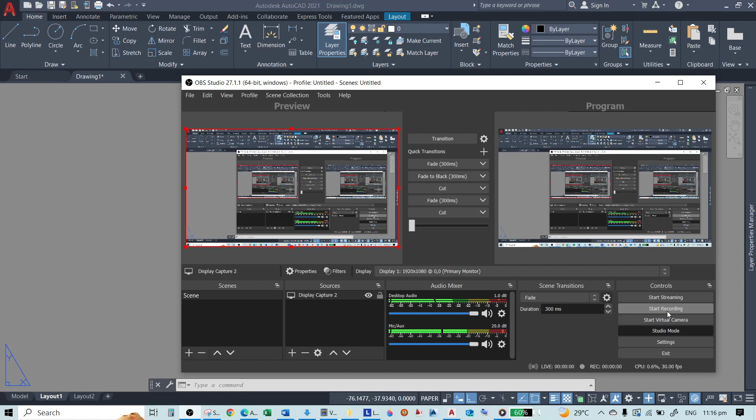Hello everyone, this video is about how to make section drawings in AutoCAD. So there are various ways of making section drawings or section views in AutoCAD.

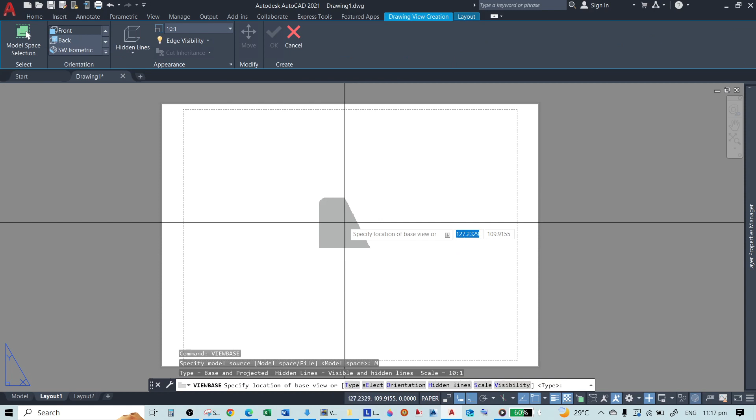One of those is using the command VIEWBASE. Type VIEWBASE and then select this one. So this is our drawing in our model. This is the front view, the right, left, top.

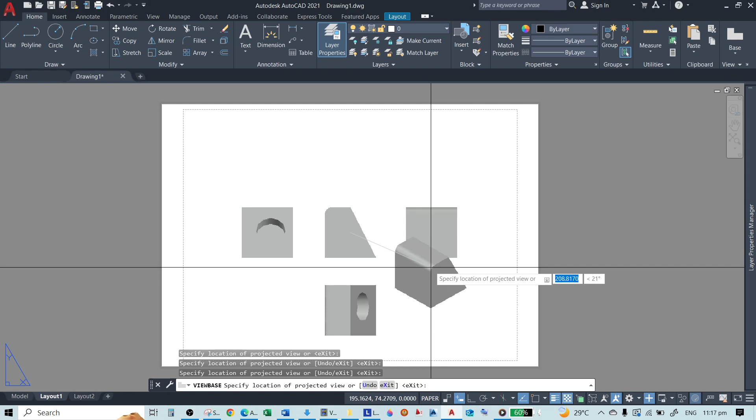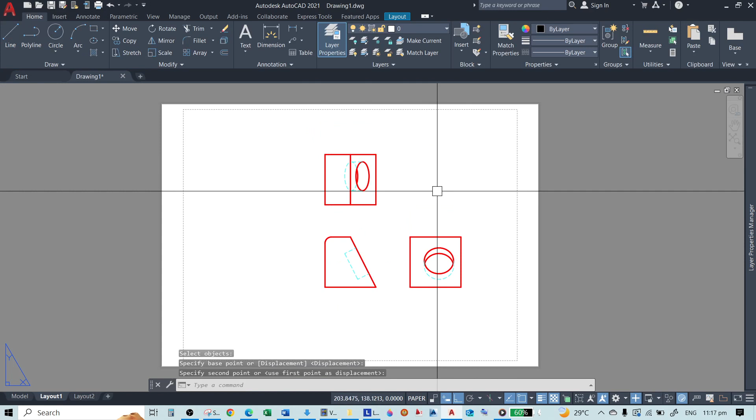So let's say for example we make a section view out of this drawing, let's say this top view. What we can do is just select this drawing and then go to section, so you can select whatever type of section you want. Let's use full section.

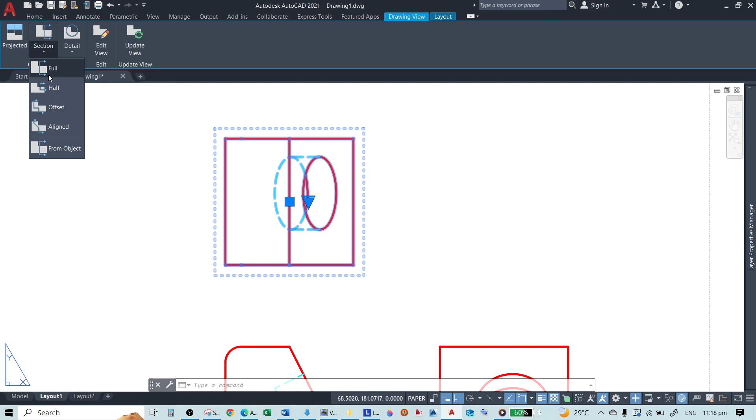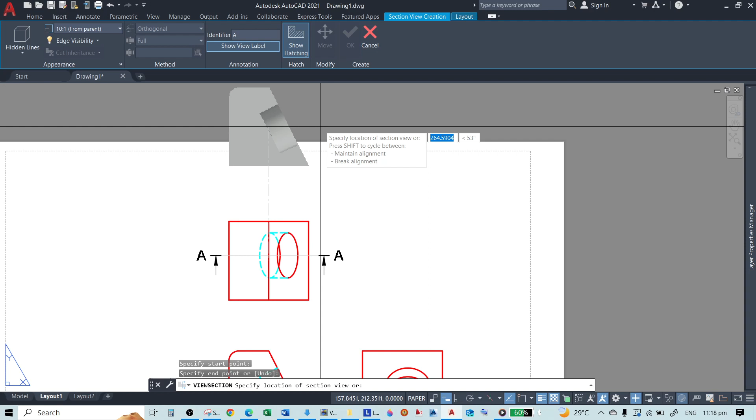Let's say coming from here, so wherever the arrow is pointed, that is where the part will be left to be shown in the section view. So for example this one, automatically this is already the section view.

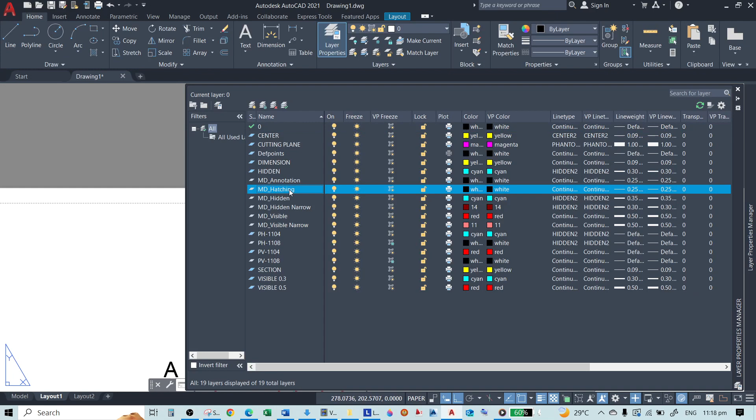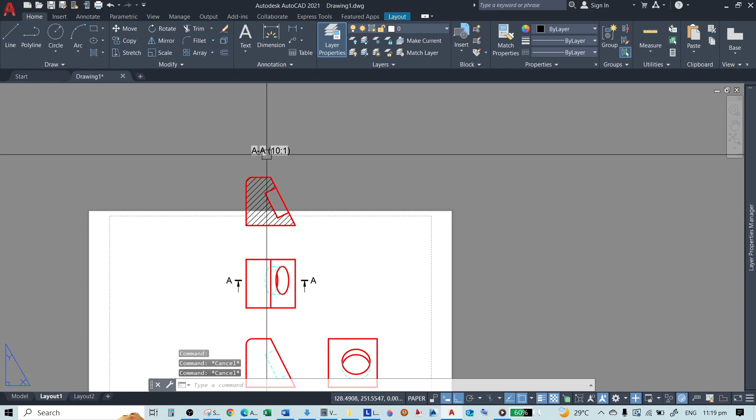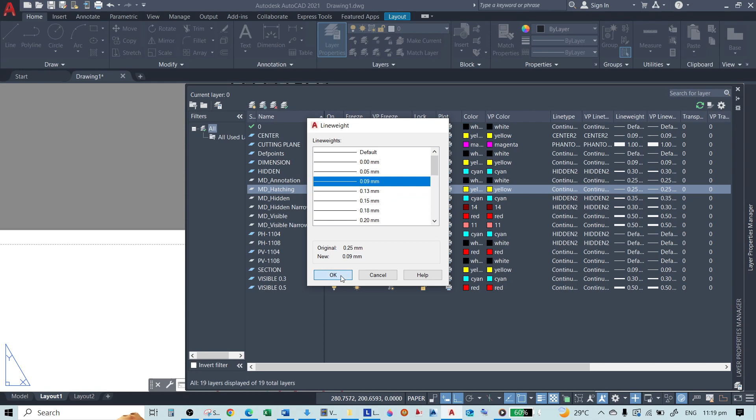Now this hatching, of course you will set this into the standard properties. Okay, this one. So this is our section view. You can delete this or just move it.

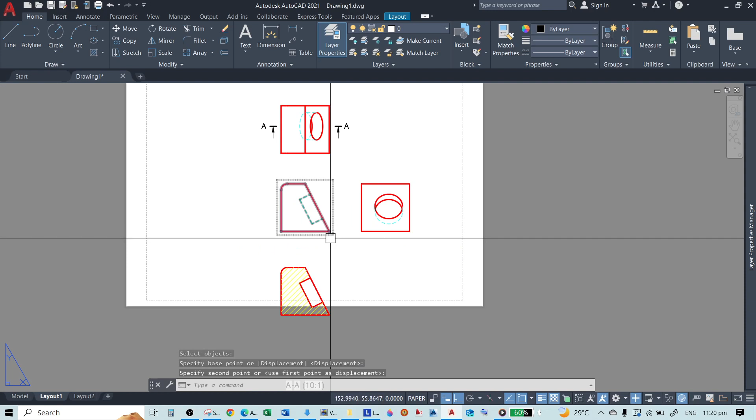Okay, now that's how easy it is to show the section view of this drawing.

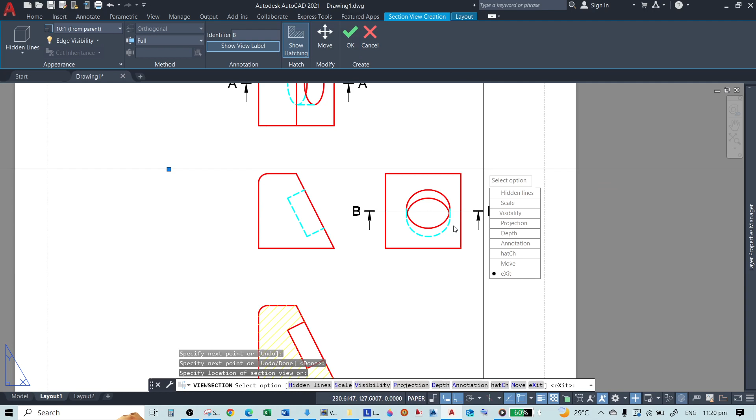Now let's say for example another one, for example I will make another view. Okay, excuse me.

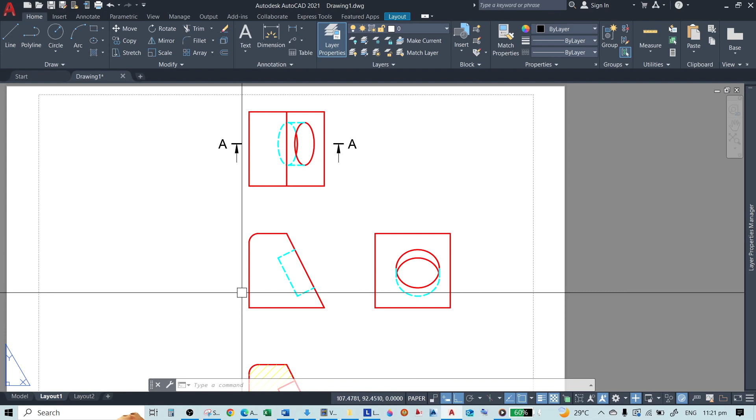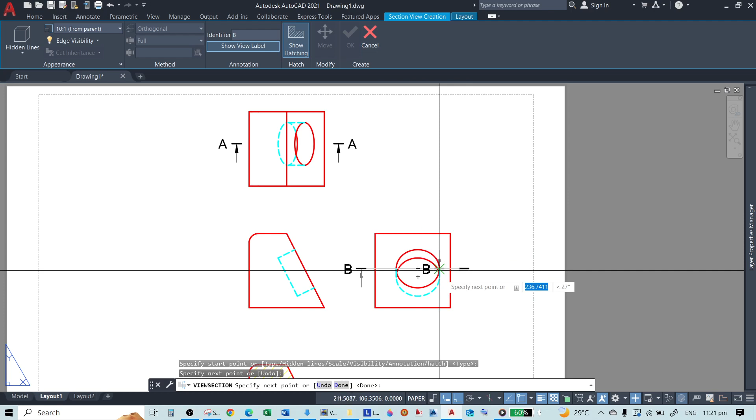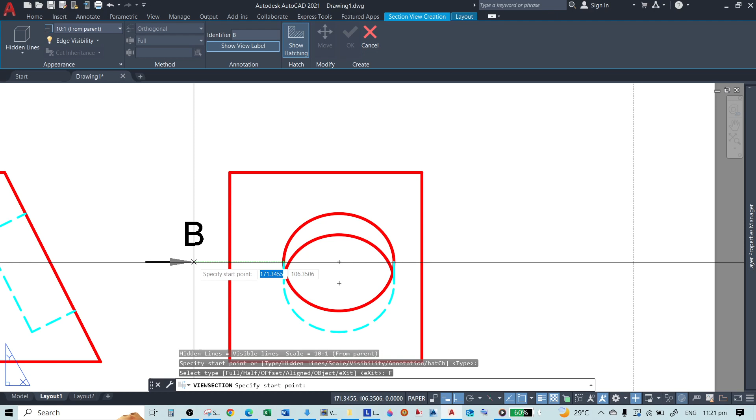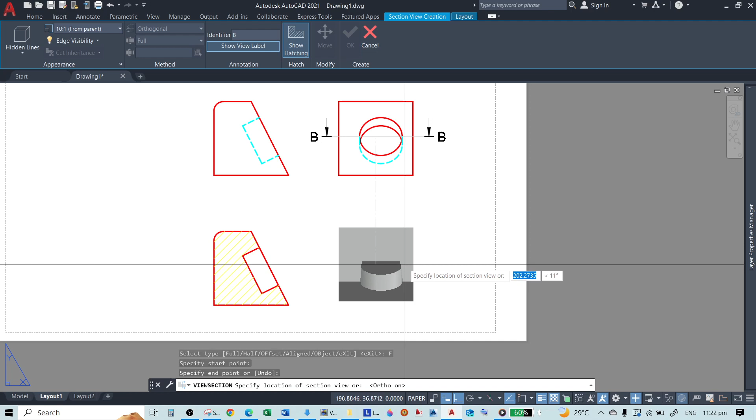Sorry, I'm trying something I haven't tried yet, let me see the result. If I click section here. So what I am doing right now is testing whether it's possible to automatically make an isometric drawing that is in a section view. As you can see right now, it's not possible to do that. So it's really not possible. Is that possible? I don't know, maybe I haven't figured it out yet, but for example...

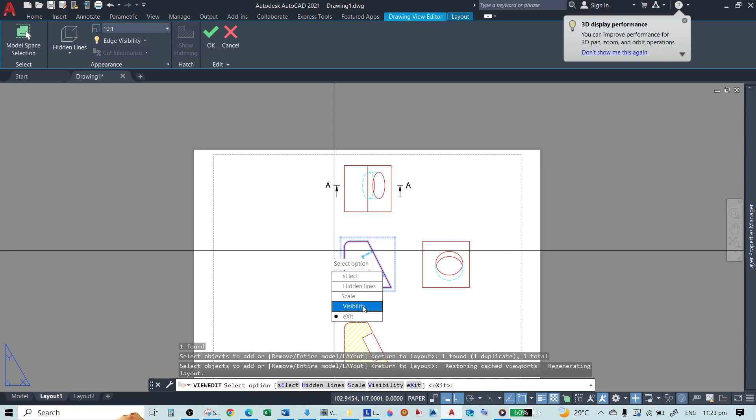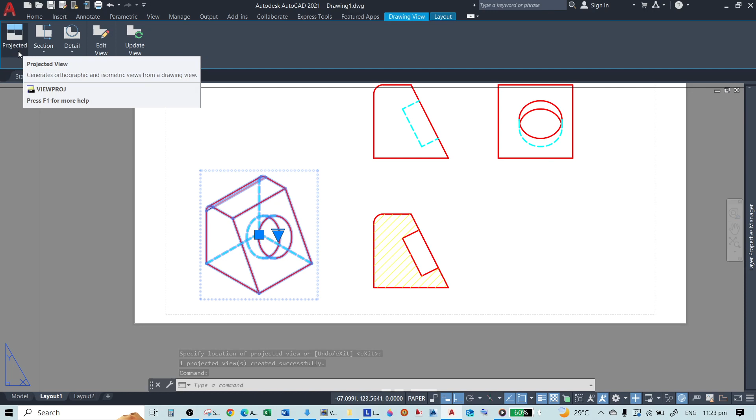So let's say for example we will make an isometric view. So it seems it's not possible to automatically section a projected isometric view. So it is not possible. Anyway, you can still use this, this is the easiest way to do the section view.

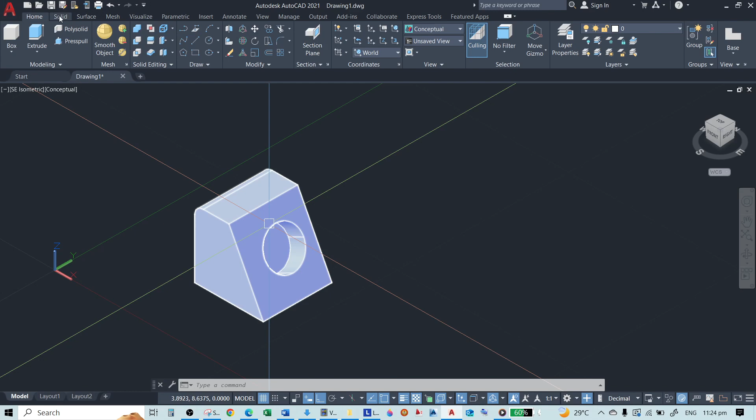Now the next one we're going to do is using the SECTIONPLANE command. So let's change the interface into 3D Modeling. Now go to Solid, it should be around here, or under Section, it can also be found there. Anyway, so this is the section plane, and then set the section plane you want.

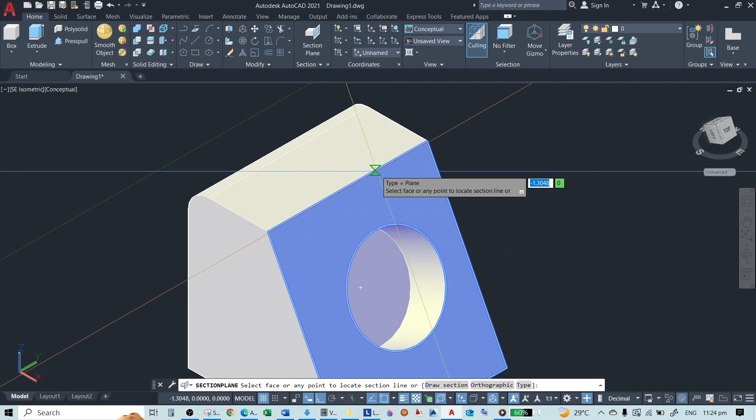You can draw it or you can use the orthographic view type, because what I want to do here is just make a full section view out of this drawing. I will just click orthographic. Now I will choose front. This is the front. Okay, so this is the section plane.

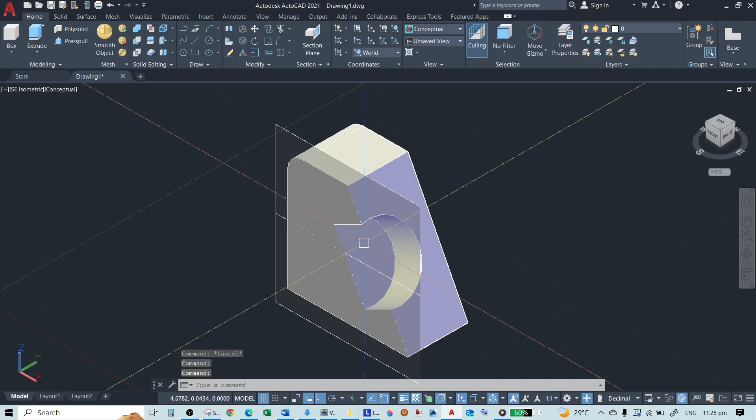Now using the section plane, as you can see, it is already in section view. Now what I am going to do is just select this plane here, right click, and then generate section 2D or 3D block.

Now this will prompt Generate Section/Elevation. We can make a 3D section or elevation. So using this one you can get a 3D section, the isometric drawing that is in section view, and then it includes all objects, or select objects to include. So if there are a lot of objects in your drawing, and you only want one of those to make the section view, just select this and then select the object. But there's only one, so I will just use include all objects, and then insert as new block.

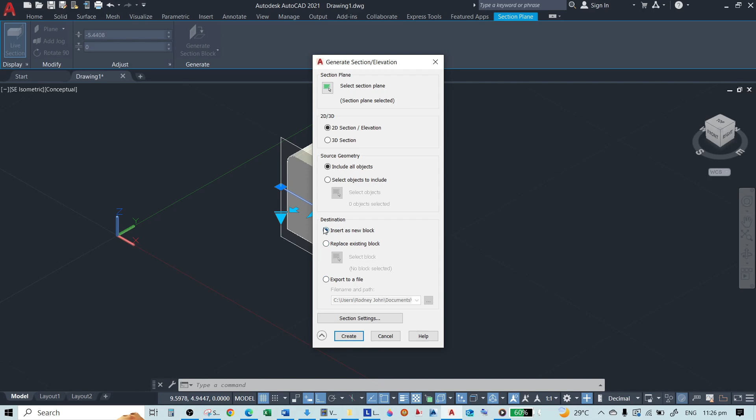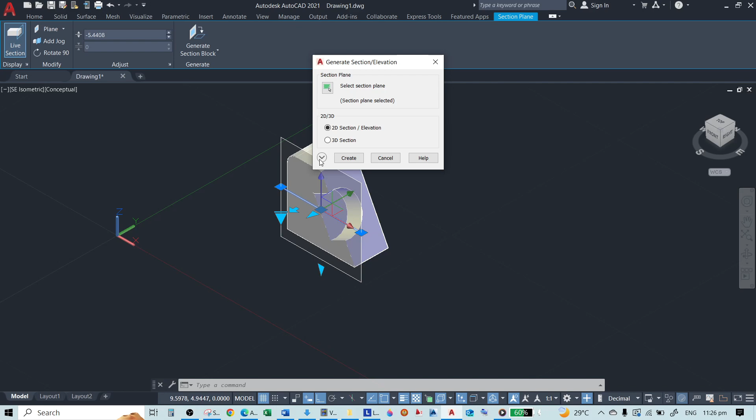Same as last time, or replace, but for this I will use insert as new block. Okay, section settings, there are settings here, but let's skip that for now to make it easier. You can try all of these here. Okay, then what else? Create. So enter, enter. So this is a block drawing.

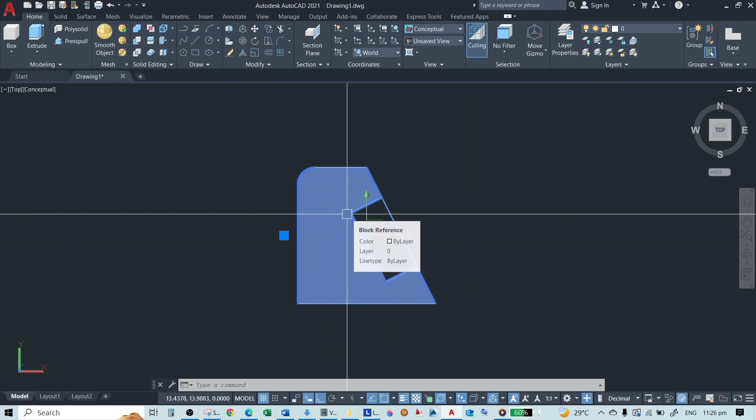Let's see at the top. So you can explode this, or you can just edit it, in the block editor reference, or in the reference edit. So I will just explode this one to make it easier. And just this.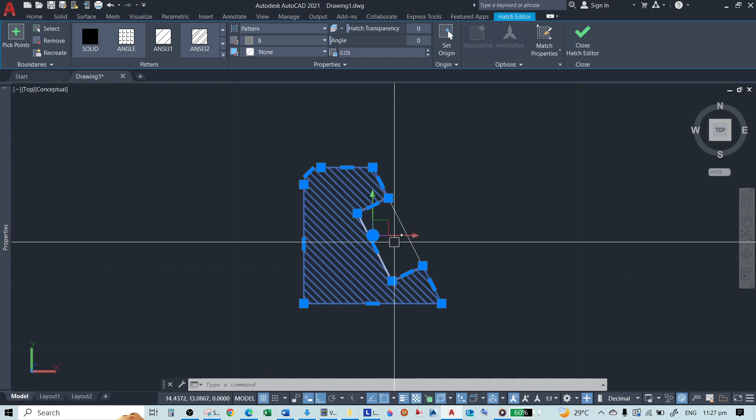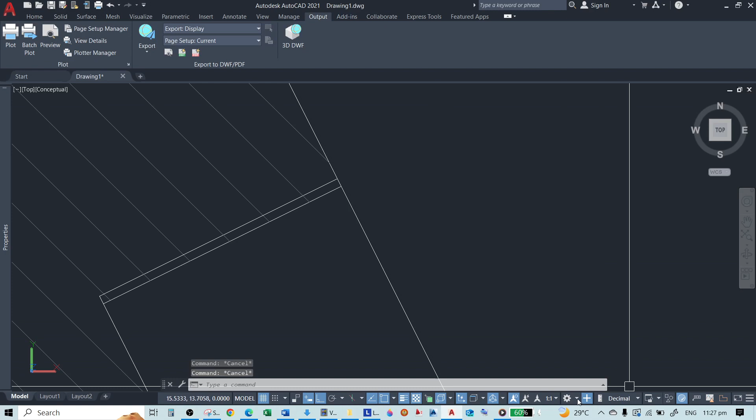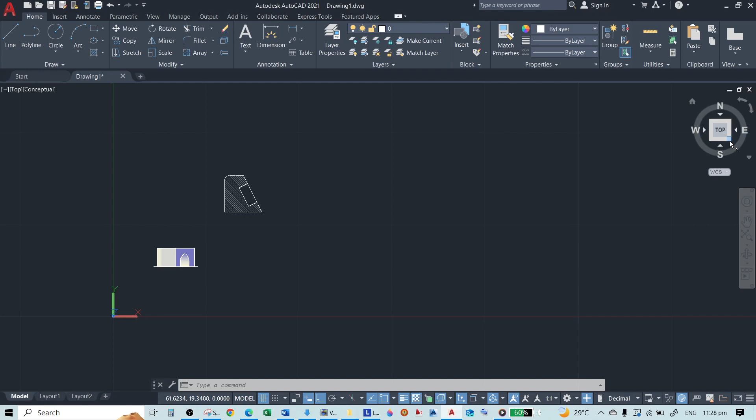Change the scale to 0.05, let's say for example... continuous. What is this now? Let's check what this is. Okay.

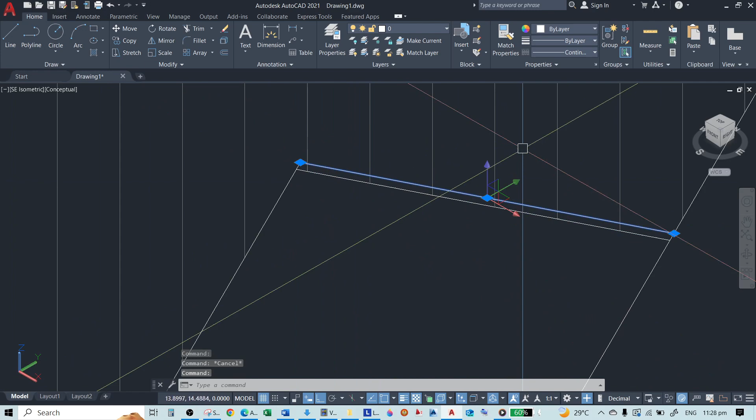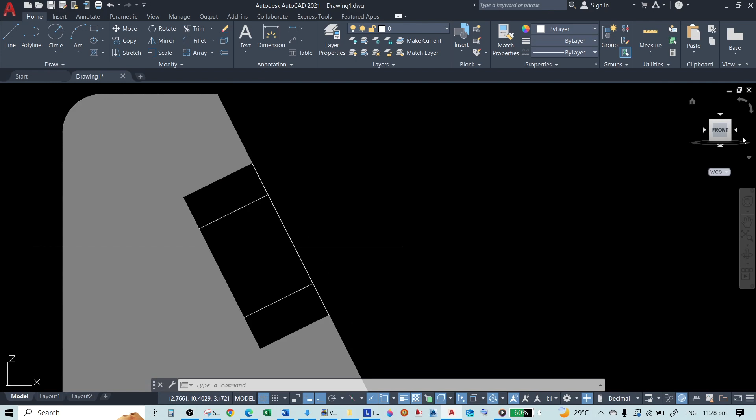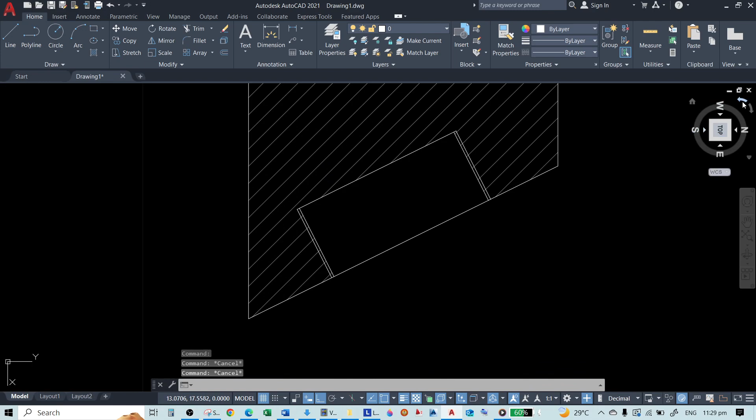Supposedly, this shouldn't be visible here, it shouldn't be. But what happened is that it's still continuous, I'm not sure why. Okay, this part is good in the front view. As you can see, if we change this to 2D wireframe, as you can see, this part here is shown like this. This should be hidden line, right? But it's not showing as hidden line, you can see it's still not edited. So there are times when you need to manually edit it, it doesn't automatically become a hidden line.

So change the properties however you want here, and that's it. You can delete this one if you don't need it. So this is the section view using the flat shot.

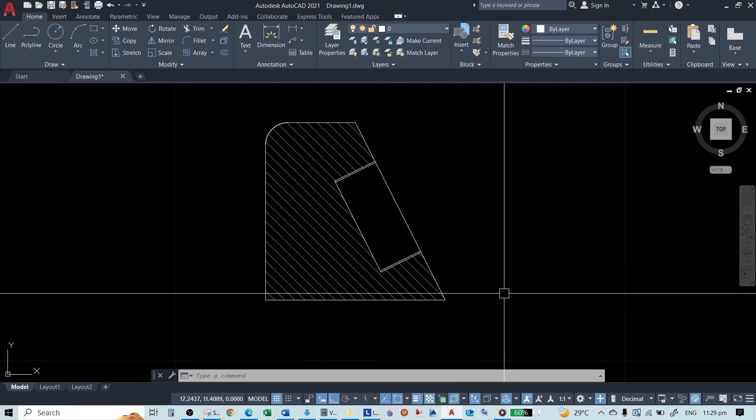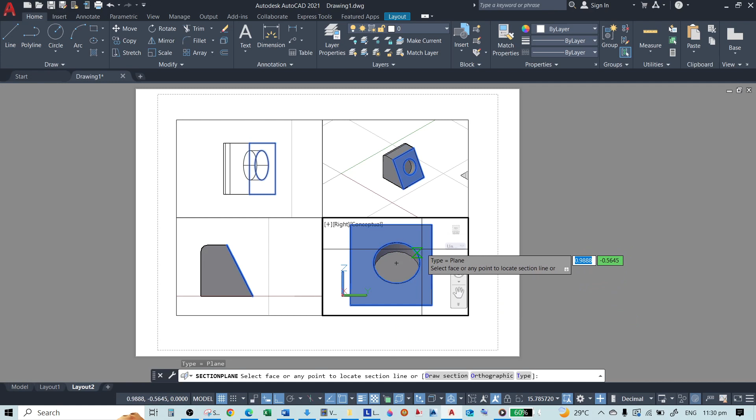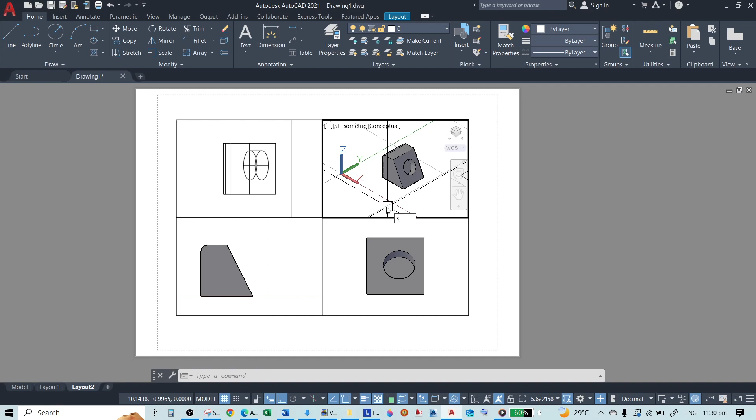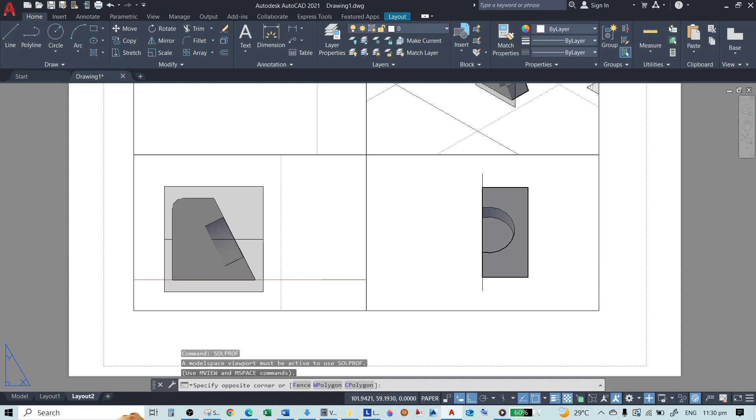Section plane. So here it is. For example, here. I will do one section. Say orthographic. So for example, this one, I will reserve this one, reserve solid profile, SOLPROF. Yes.

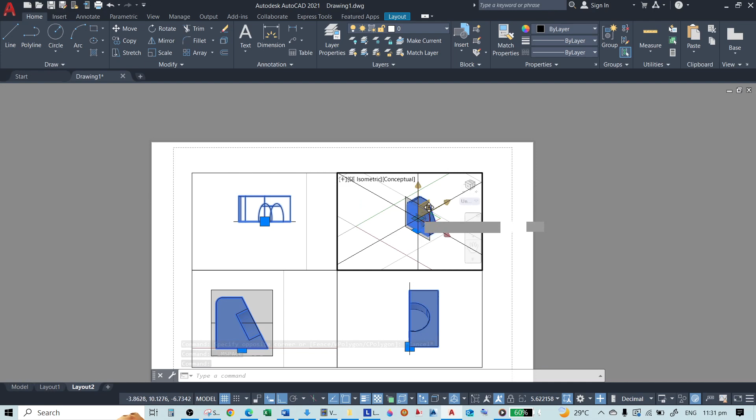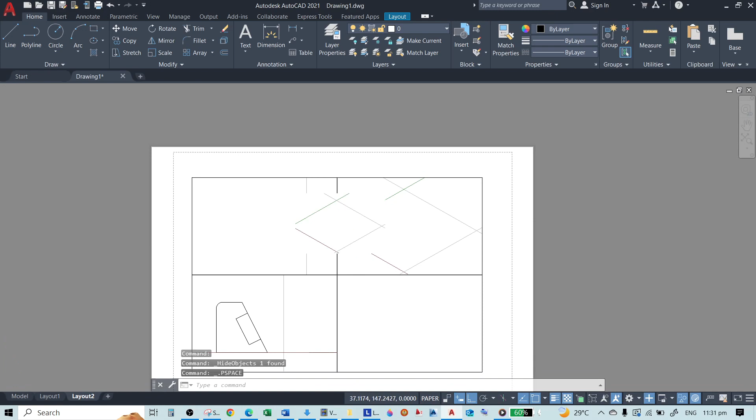So let me see. Let me hide this object here. Let me just delete the section plane. The issue is the center wasn't set properly. The section plane here is like this, that's why it shows like this. It's because there was no center, it needs to be centered.

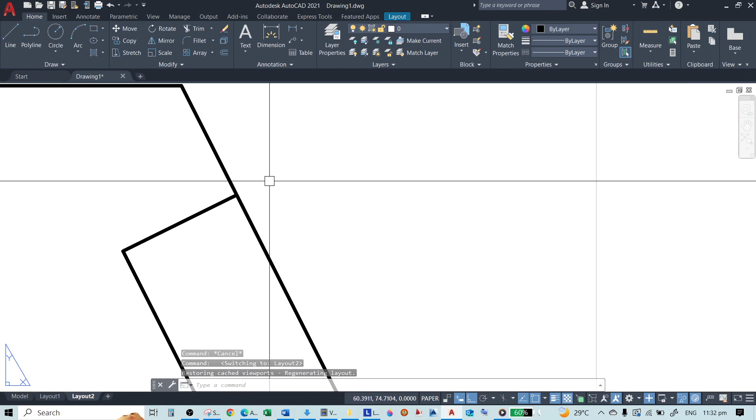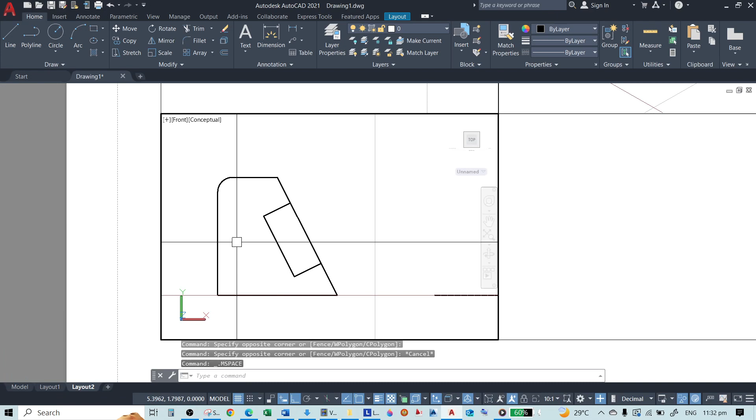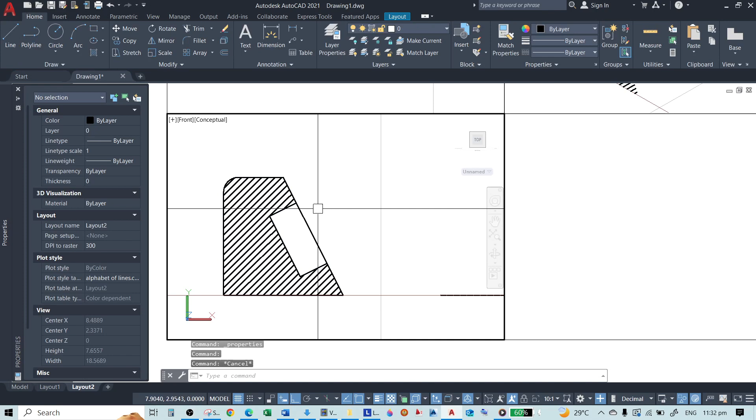That's why it wasn't showing. Okay? That's what happened here. So you need to center it because that's the proper way of doing it. So you can do a section here. Because it hasn't been hatched yet, of course what you'll do is hatch this one. Hatch. And then... okay. So after that, set your drawing according to the properties you need.

I think that's it. So those are the things you can do in making section views in AutoCAD. So if you have other ways to do it, please don't hesitate to share it so that many would benefit from it.